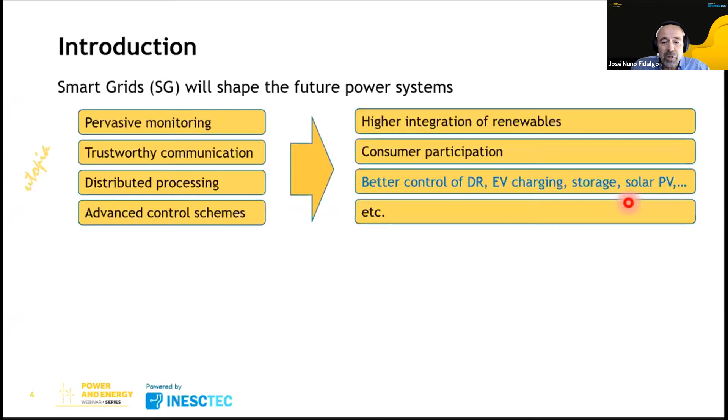Let's imagine a future perfect smart grid with omnipresent monitoring, reliable communications, distributed processing everywhere, and advanced control abilities. These features would allow deeper integration of renewables, consumer participation, better control of demand response, electric vehicle charging, storage, etc. So many researchers conclude that these features can make the load diagram flatter, allowing the postponement of investments in grid infrastructure.

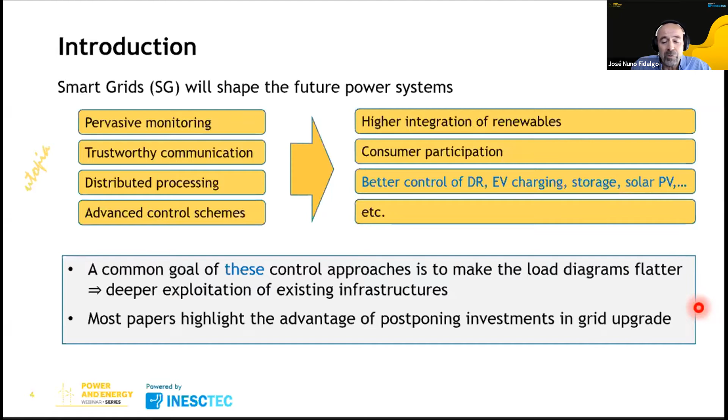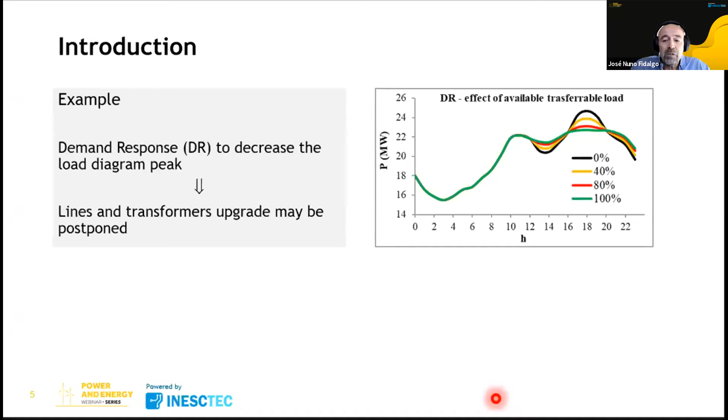For instance, let's consider a demand response program designed for peak shaving, and assume it works perfectly. This would allow the postponement of investment in grid upgrade. The question is, how valuable is upgrade postponement? Should we always do it? Let's see what we found.

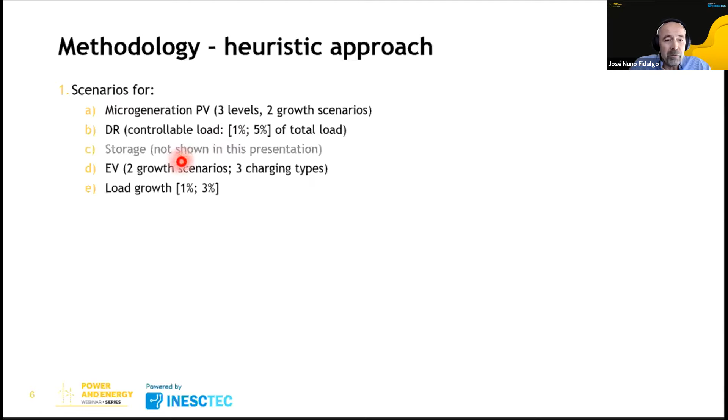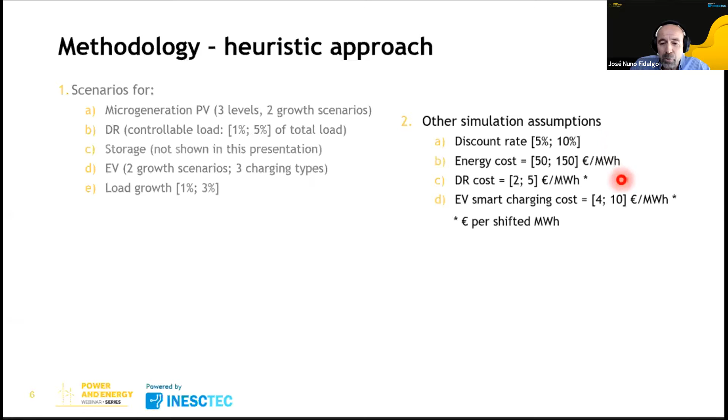In the referred Citines project, to analyze this question we adopted a heuristic approach where several combinations of microgeneration, demand response, and EV growth and charging types, along with load growth, were considered. Many scenarios were considered, plus other simulation parameters such as the discount rate necessary for long-term economic appraisal, energy costs, and so on.

The next phase is power flow, to simulate the network under all those conditions, and this was repeated for a time period of 20 years. In parallel, we also computed the costs, characterized in terms of net present value, including investment costs for reinforcement of lines and transformers, operational costs, and amortization costs over a time span of 20 years.

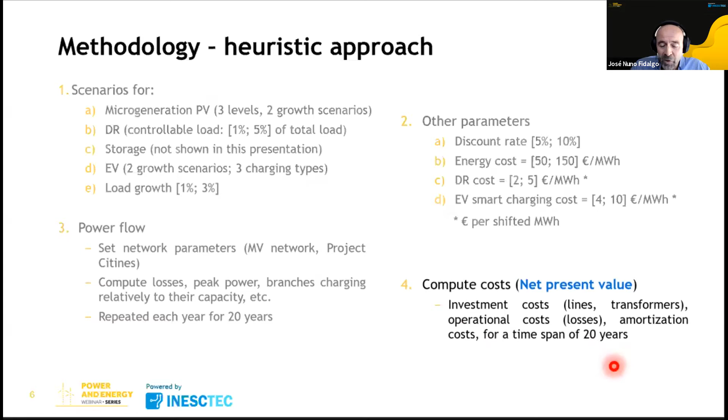So for illustration purposes, let me just show two types of scenarios for microgeneration PV and for electrical vehicles. When we first were involved in this project, we borrowed these projections from official entities, although, as you know, there is always a big level of speculation. But in any case, there are scenarios.

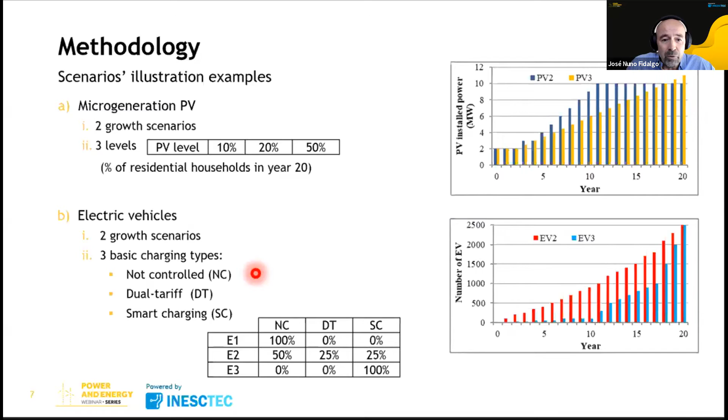For instance, electric vehicles, we have two growth scenarios and three basic charging types: non-control, dual tariff, and smart charging. And of course, according to the electric vehicles dissemination, according also with the charging type, they have different impact in the load diagrams.

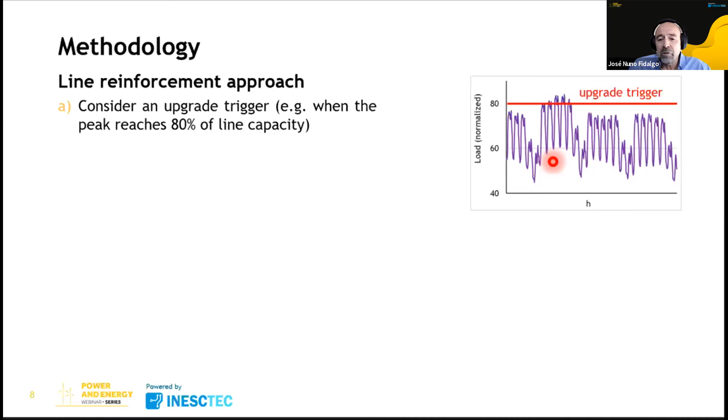In what concerns the reinforcement procedure, we developed an approach in the framework of a project with a Portuguese DSO. The first step consists in setting a criterion for starting the upgrade. In this example, it is when the peak of the diagram reaches 80% of the maximum capacity. Suppose it is a line. When it reaches 80% of the line maximum capacity, we start the upgrade procedure. In practice, this criterion might be combined with other drivers, such as some quality of service index also, but let's forget this for the moment.

Then, for a set of available cables, consider these are the available cables. We must choose the feasible ones. And by feasible, we meant, for instance, if the current line is a 70mm cable, we cannot replace it with a 50mm one because it will have a smaller capacity.

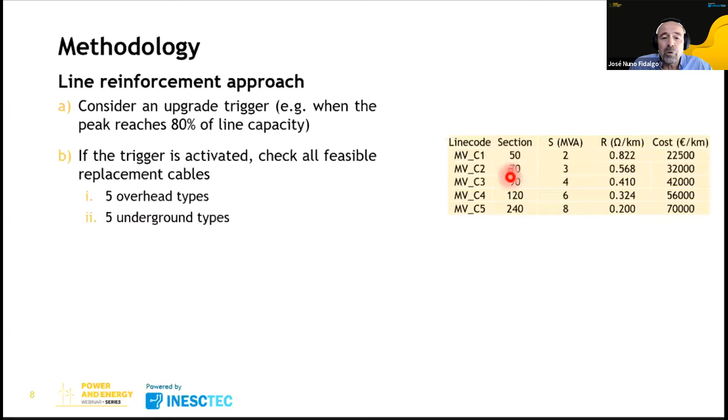And we should compute all the case for all solutions, combine these costs, including the amortization costs, and at the end, we choose the solution with the lowest cost. In this case, it will be this one.

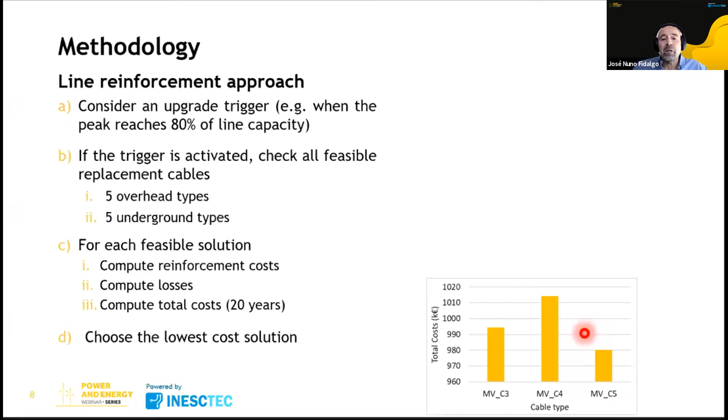So we applied this in the scope of the INESC project, and let me show some results. Several scenarios are considered here, 18. In this table, the first column just identifies the scenario.

The second column is the demand response level. 0% means that no demand response is considered. 3 and 5% are related with the amount of energy that is shifted from the peak. And of course, this is repeated: 0, 3, 5, 0, 3, 5%, and so on.

Third column is the PV scenario. Three are considered in this case, PV 1, 2, and 3. It's not important for these examples to know exactly what represents each PV scenario. And in terms of electric vehicles, we consider the hypothesis non-controlled charging and smart charging.

So for a matter of simplicity, let's compare the green cases with the brown cases, okay? The green cases have non-controlled charging, while the brown case is smart charging. The rest is equal: PV2, the scenario for PV, and the demand response 0, 3, and 5%, and the same in this case, 0, 3, and 5%.

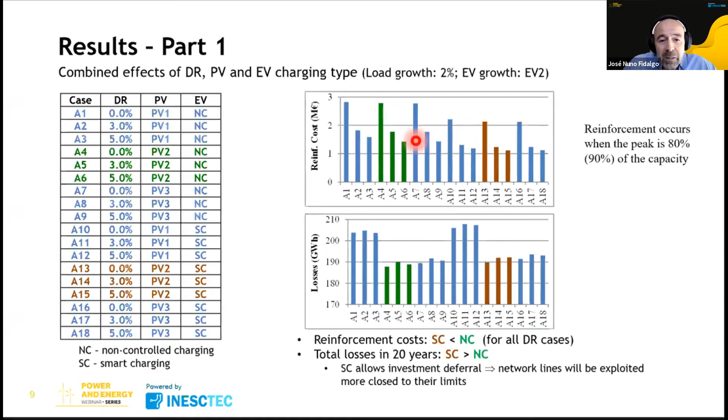Now let's see the other face of this coin. If we compare the losses of non-controlled charging with the losses of smart charging, we see that non-controlled has smaller losses than smart charging. This is natural because, as the reinforcement level for non-controlled is higher, we probably will have lines with larger sections, and so the losses will be smaller.

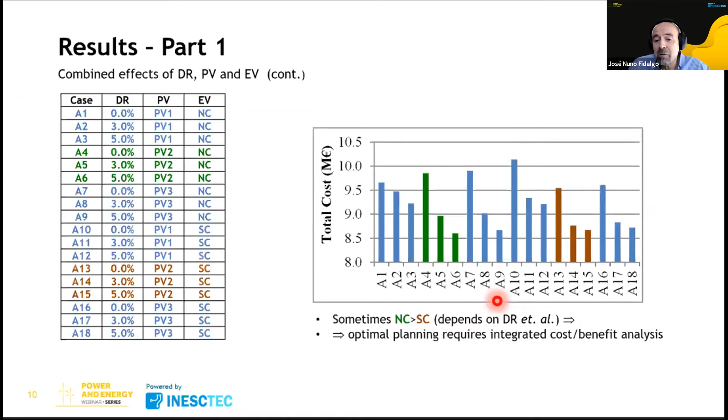Now, let's look at the total costs. When we aggregate the costs of reinforcement, the cost of losses, and the corresponding amortization costs, we obtain these figures. Again, we see that in general, smart charging has lower costs than non-controlled charging, but this is not always true. Just compare the A6 case with the A15 — in this case, the cost is lower. So, in fact, what we can conclude is that there is a trade-off between saving in investments for reinforcement and saving in avoiding losses.

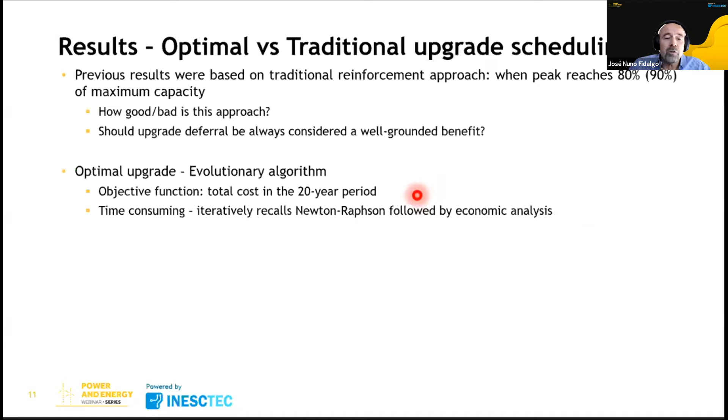So in face of the previous results, we thought we should try to find an optimal reinforcement strategy, and that's what we implemented. We used an evolutionary algorithm, and the objective function was to minimize the total cost in the 20-year period. This is quite time consuming, so we need to consider several simplifications.

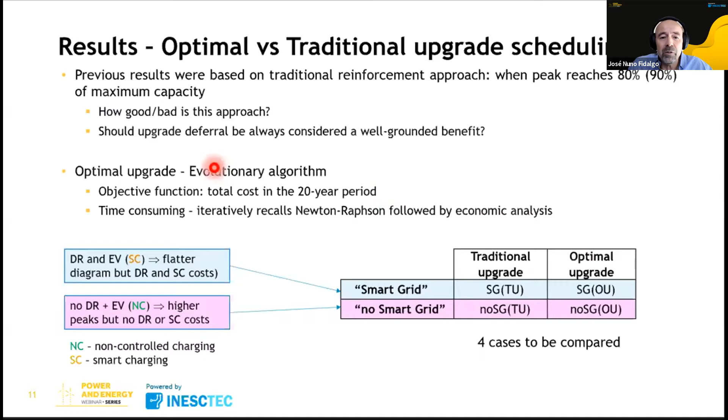One simplification is to reduce the number of scenarios. For this case, let's just consider these 4 scenarios, which are the combination of 2 network types: a smart grid, where we can perform demand response, smart charging of electric vehicles, and so on; and a non-smart grid, where none of these things can be done. These network cases are combined with the traditional upgrade, used in the previous study, and with an optimal upgrade provided by the evolutionary algorithm.

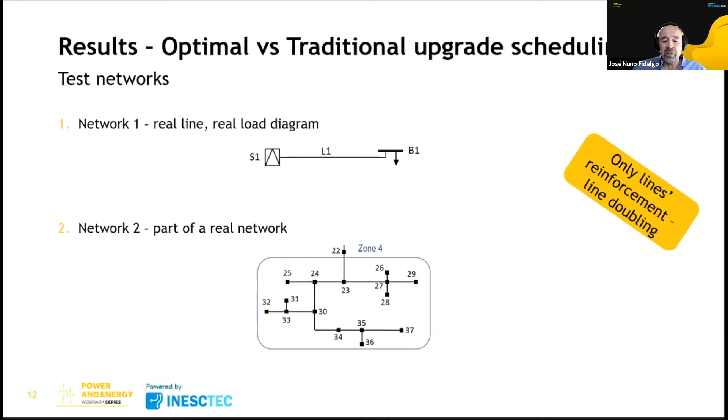Some more simplifications: very simple networks. One of them is the most simple one you can imagine. It's very simple, but is important as a proof of concept. Also, for reinforcement, we only consider line doubling. Whenever reinforcement is to be applied, we consider just the installation of a similar line in parallel with the existing one, so the total resistance will be half of the original one. This simplifies the process a lot. Yes, we know this is not according to practice, but it will be enough as a proof of concept, as we will see in the next slides.

So let me amplify this for you. These are the results in terms of upgrade costs or reinforcement costs, and here we have the cases: no smart grid traditional upgrade, no smart grid optimal upgrade, and the same for the smart grid traditional and optimal.

Let's concentrate on the optimal upgrade case, so the green and blue bars. Note that the green and blue bars are all in the first years. In fact, the optimal upgrade anticipates the reinforcement, while in the other case they are activated when the peak of the diagram reaches 80% of the maximum capacity. The optimal upgrade says we should upgrade as soon as possible.

This might be a bit strange, but we'll see in a moment what the consequences of this are. Another conclusion is that the optimal upgrade is much more expensive than the traditional upgrade. For instance, compare the red bars with the blue bars for the smart grid case: traditional upgrade, we would spend 100,000 euros in this reinforcement, while with the optimal upgrade it's 100,000 plus 200,000. So we spend 3 times more with optimal upgrade than with traditional upgrade.

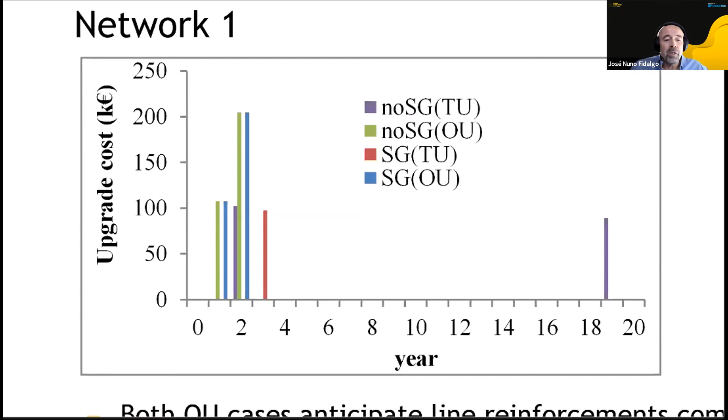Okay, now let's see the other face of this coin: losses. When we look at the losses, we see the opposite. The optimal upgrade, again the green and blue bars, has much lower losses than the traditional upgrade, both for smart grid or no smart grid. The green and blue bars are always below the purple and red. So the losses are pretty high in the traditional upgrade when compared to the optimal upgrade.

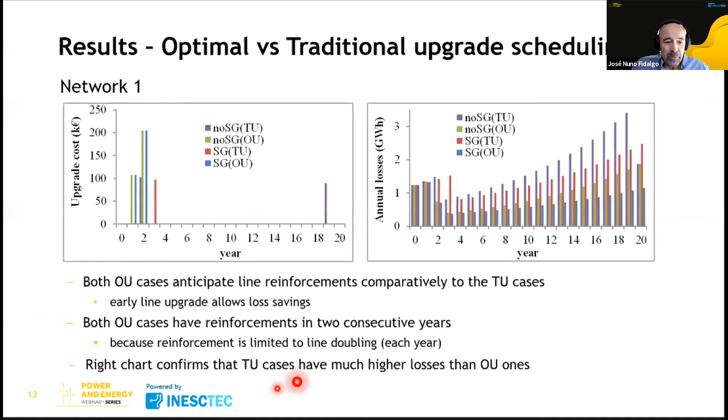Now let's look at the total costs. When we join all the costs, including the amortization costs, we see that the optimal upgrade has much lower cost than the traditional upgrade, both for smart grid and no smart grid cases. We also see that regardless of network type, no smart grid or smart grid, the costs are very alike, comparable. These results are for network one. Remember, it's just one line.

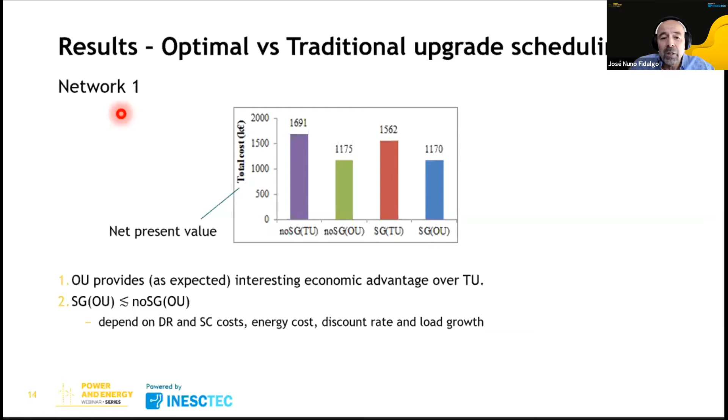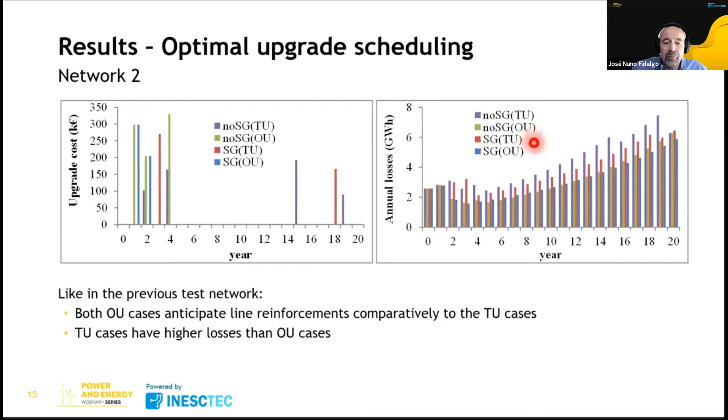Now let's see what happens in network two. For network two, the conclusions are pretty similar. Again, most of the reinforcement costs are in the first years. If you compute the upgrade costs with the optimal upgrade rule, they are bigger than with the traditional upgrade, and again the losses for the optimal upgrade are below the losses of the traditional upgrade. When we compute the total costs, we obtain very similar results. Again, the optimal upgrade shows smaller costs, about 10% less than the traditional upgrade. And again, we have smart grid and no smart grid with similar total cost.

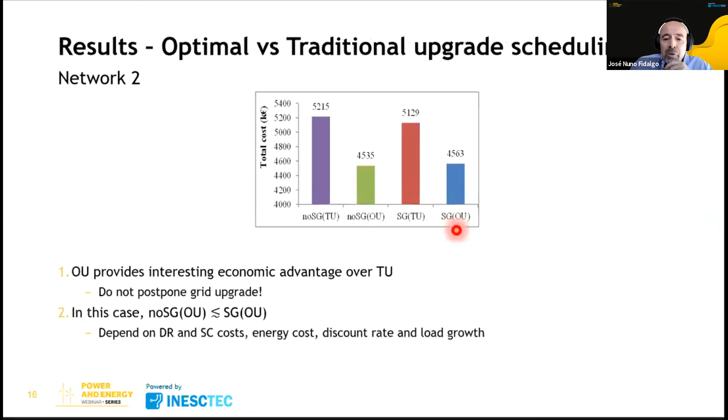So there are lots of conclusions, but I would say the main conclusion is that postponement of grid reinforcement is not always the best option. In fact, our results show that sometimes it is better to anticipate the reinforcement.

Our optimal upgrade approach is very demanding and far from practical. So what if instead we try to find the most economical upgrade trigger? We considered the trigger of 80%, but what if we consider all these possibilities from 50, 60, 90%, and choose the most economical option?

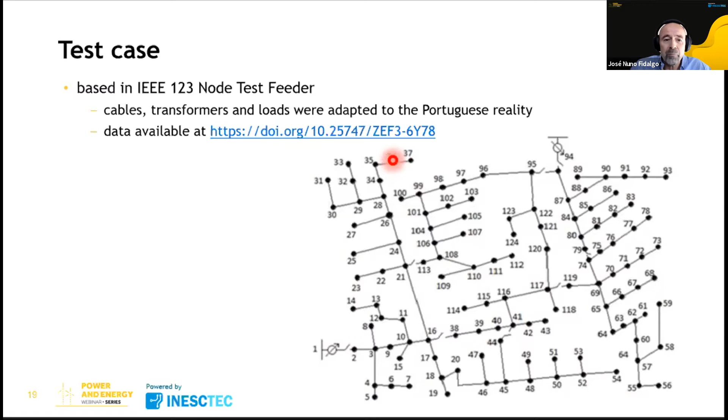That's what we did. In this case, the network test was this one. The data is available on our site, and I can share it if you are interested. The methodology was very similar to what was used in the initial study, but instead of a fixed upgrade trigger, we consider this variation from 50 to 90% in steps of 10%.

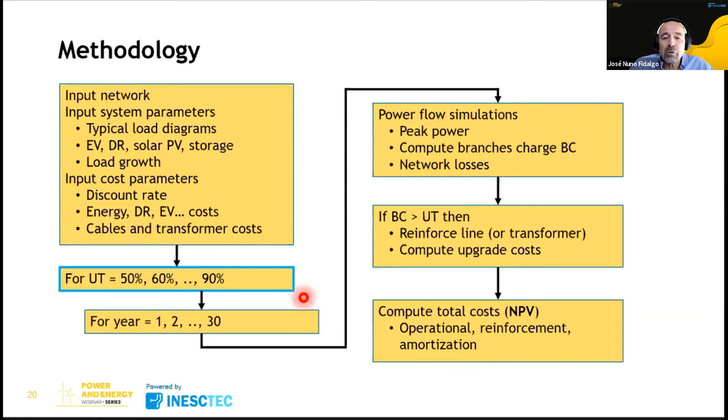Now let's look at the results. First, I will present the results with an energy cost of 101.3 euros per megawatt hour, which was the reference price in Portugal in 2016 for medium voltage. These results are parameterized in terms of discount rate. I would say that nowadays this case will be the closer to the one used in projects, 5% or 6%, which is the most usual.

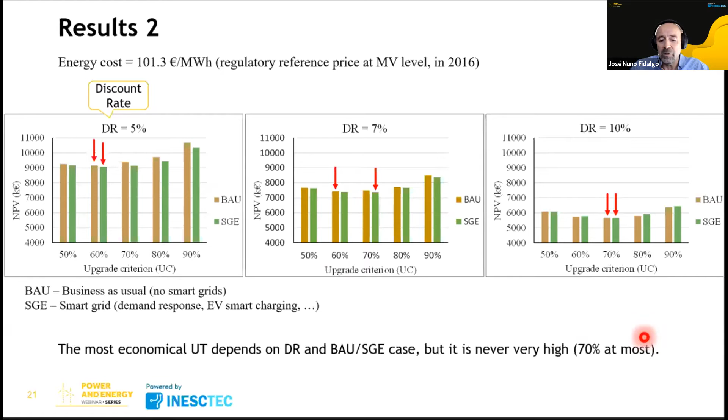Another detail is that, as in the previous study, this was made for a network with no smart grid, business as usual, and for a smart grid environment, the green bars. We can see that the upgrade trigger leading to the lowest cost is 60% for this discount rate, and in another case 60 or 70%, and in this case 70%. So the most economical upgrade trigger depends on lots of parameters, but it was always 70% at most, never very close to the line capacity limits.

Now with the energy cost of 150 euros per megawatt hour. This was suggested by an Italian colleague because in 2016 that was the reference price in Italy. With this price and similar conditions, the best upgrade criterion is 50%, and in this case 60% for a discount rate of 10%. So it's low, meaning we should anticipate the grid upgrade. Why? Because with higher energy costs, we have a higher value for the losses, so we should try to avoid the losses as much as we can.

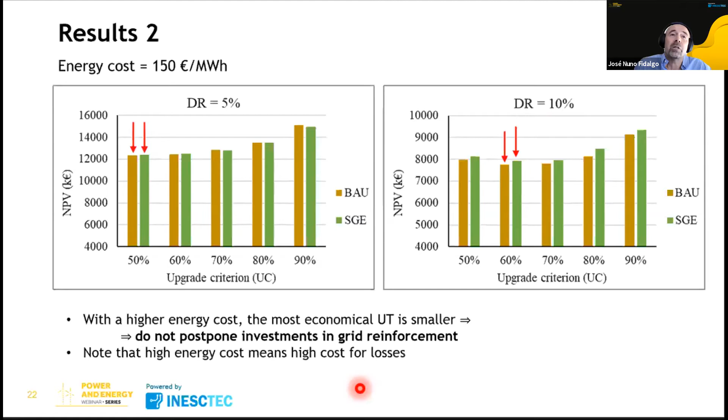But note that if we were able to shave this peak with some kind of demand response initiative, then after this action we would obtain a diagram of the kind used in the previous studies. So the question is, after this, we would probably conclude the same thing.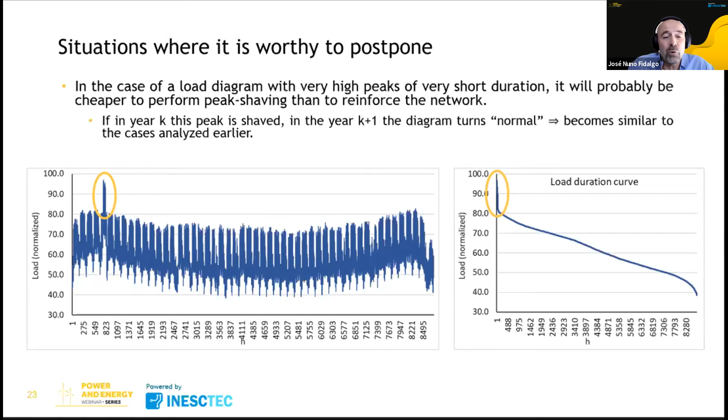Jumping to the conclusions, it's true that smart grids empower the potential to postpone network investments, but this is often disadvantageous—you can do it, but you should not do it. The global costs depend for sure on several parameters, but we found that the upgrade trigger that provides the lowest costs is between 50 and 70%, never very close to the maximum capacity, so do not exploit the network too close to its limits.

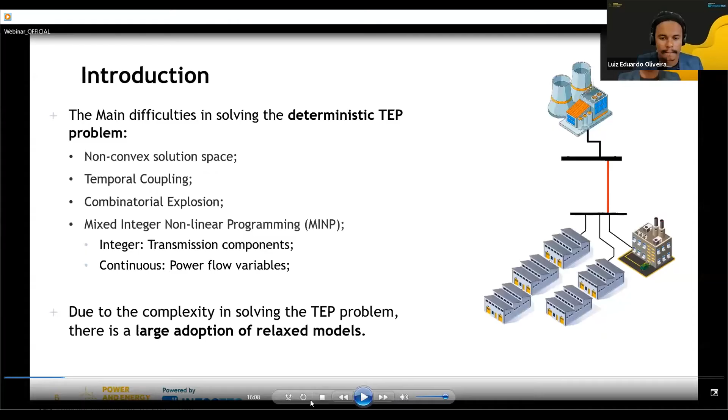Hello, everyone. My name is Luiz Eduardo Oliveira, and today we'll talk about transmission expansion planning and the new challenges.

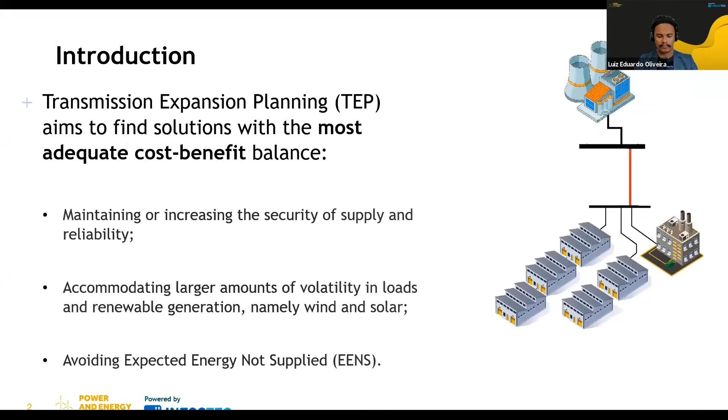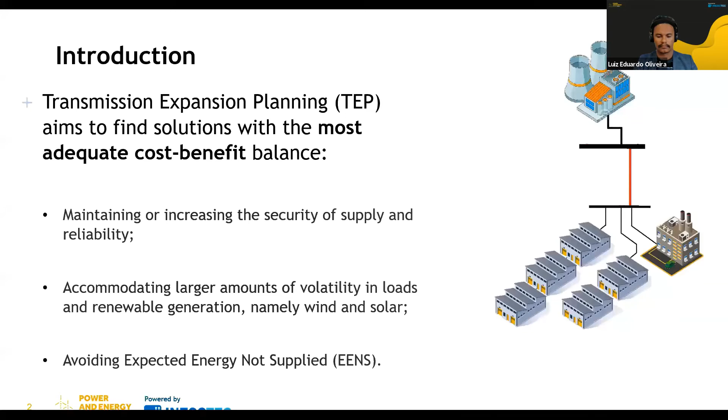Transmission expansion planning basically is a problem that aims to find solutions with the most adequate cost-benefit balance. Normally the planner wants to maintain or increase the security of supply and reliability, or reduce investment costs, accommodating larger amounts of volatility in loads and renewable generation, and avoiding the expected energy not supplied. The main difficulty in solving the deterministic TEP problem is related to the non-convexity of the solution space.

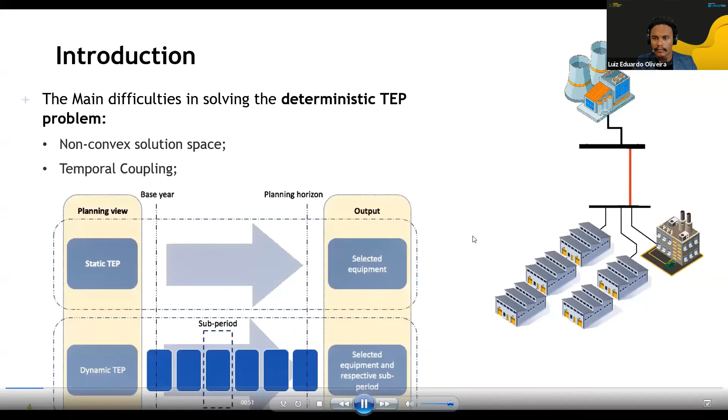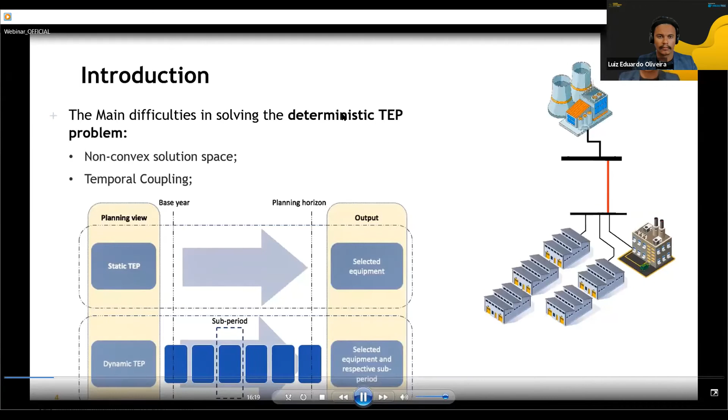The temporal coupling is another aspect that should be addressed. If the planner chooses static TEP, he will understand the planning horizon as a single stage. However, if he chooses dynamic TEP, he will divide the planning horizon into sub-periods. Another aspect is the combinatorial explosion of the possible solution set, leading to a mixed integer nonlinear programming, with integer variables related to the transmission components and continuous variables related to the power flow variables.

The new challenges that catapult the difficulties in TEP are related to the change in active load patterns due to the increase of distributed generation, electric vehicle penetration, the dissemination of smart grids and microgrids, storage systems, and the uncertain behavior of the generation players. Low carbon energy transition is also a new difficulty in TEP problems, with the growing share of renewable energy sources and the decommissioning of coal-fired plants, changing the system topology year by year.

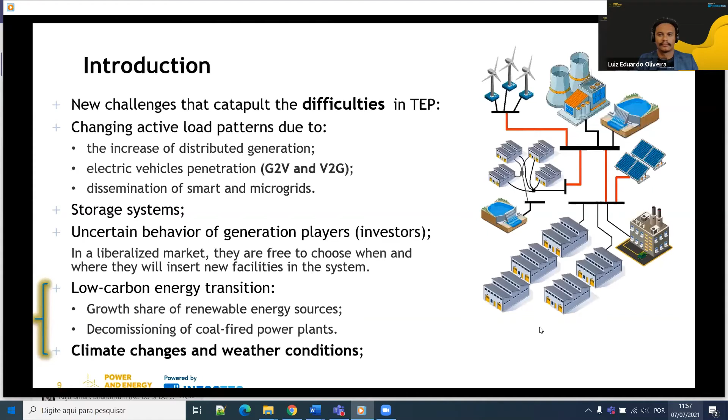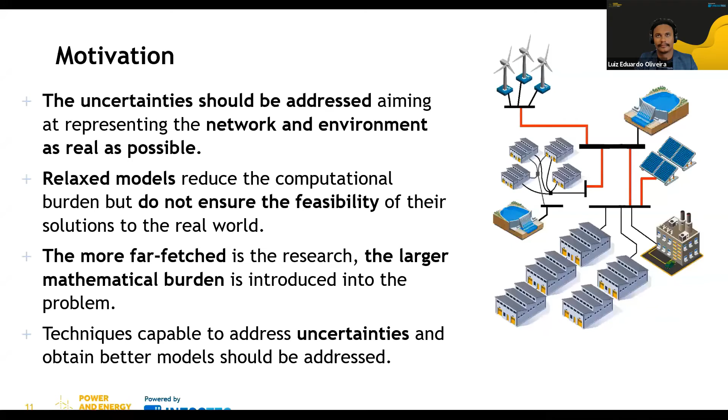The 9 heel-to-toe steps test is a simple and easy test that can show the necessity of representing uncertainties. If you choose a random guy in the streets and ask him to do that test, it represents 9 steps forward and 9 steps back.

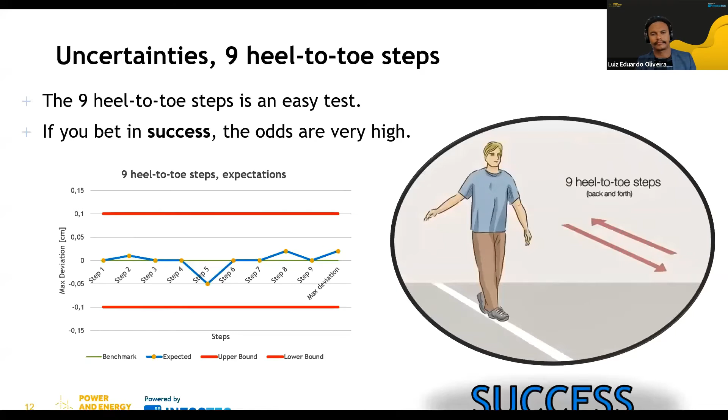If you bet on success, the odds are very high. However, when that guy appeared to do the test, he was completely drunk. We didn't know that two hours before the test he was drinking with his friends, so the chances of success are still assumed the same.

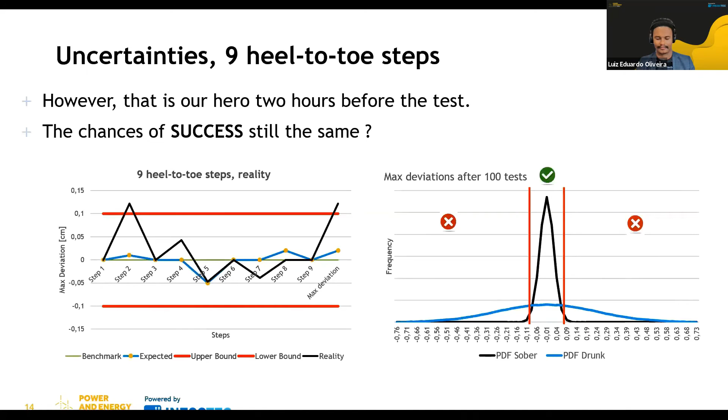After 100 tests, we see that if he was sober, he could complete the test very easily. Considering that he was drunk, the blue curve on the right graph shows that his possibility of success in this test was very reduced. So at the end of the story, the bet was not so good.

Uncertainties appear in power systems in many different ways, and they can be classified regarding their origin, their mathematical model, or their behavior in nature. Here we classify the uncertainties by their origin. Normally, only economical and technical parameters are considered, but environmental parameters have become very important to address, given climate change and weather conditions.

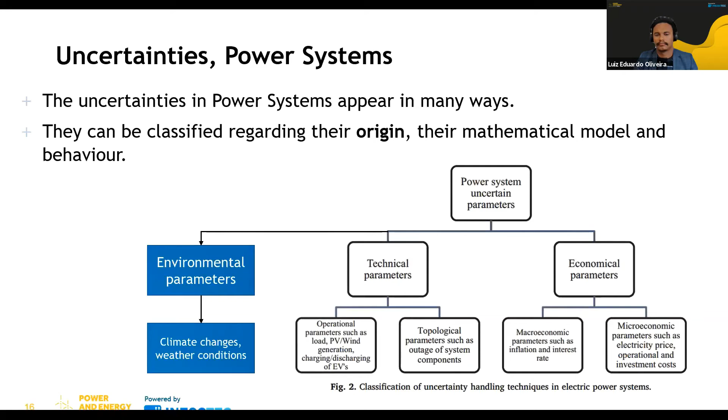If you classify uncertainties based on their mathematical model, you have three main groups: random, non-random, and vagueness uncertainties. Random uncertainties can be modeled as a PDF curve, as well as load, wind speed, or solar irradiation.

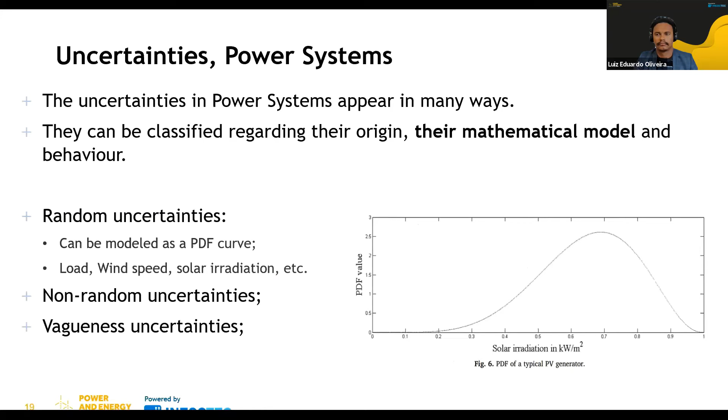However, non-random uncertainties are events that change the game, such as failure probability. Before the failure, the equipment is available; after the failure, the equipment is unavailable. Other examples include market rules, generation or substation player decisions, and governmental and incentive policies.

So basically, non-random uncertainties are something that doesn't depend on the planner, but is going to happen and change the game.

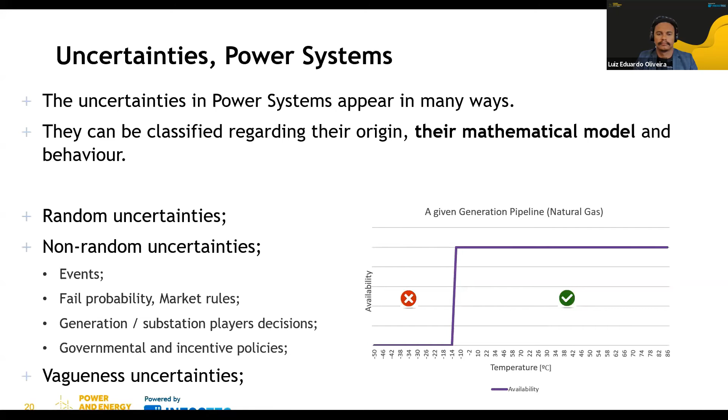And vagueness uncertainties represent something that can be modeled regarding the opinion of the planner. Vagueness uncertainties represent opinions that are not certain as numbers.

If you look at the sky at the same time, at the same place, some people would say it's blue, others that it's gray. If you think about a swimming pool and I ask you which color is the water, some would say transparent, others white, others blue or green. So it depends on your opinion.

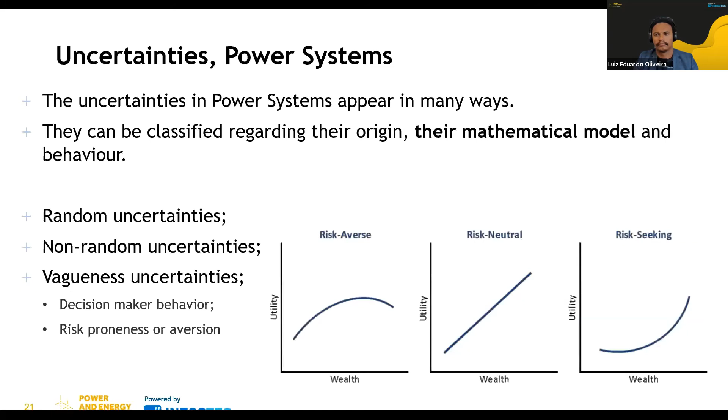Related to power systems, the decision maker's behavior is something considered vagueness. The risk proneness or aversion related to the decision maker is something considered completely vagueness, requiring fuzzy logic to be modeled and solved.

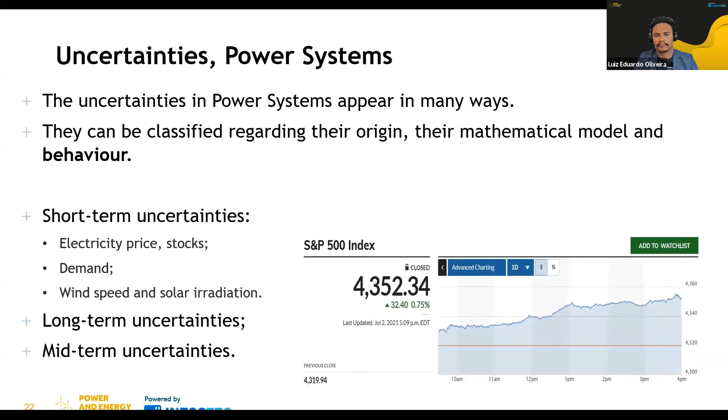Another way to classify uncertainties is related to their behavior in nature. They can be classified as short-term, long-term, or mid-term uncertainties. Short-term uncertainties change very fast, day by day or hour by hour, such as electricity price, stock price, demand, wind speed, and solar irradiation.

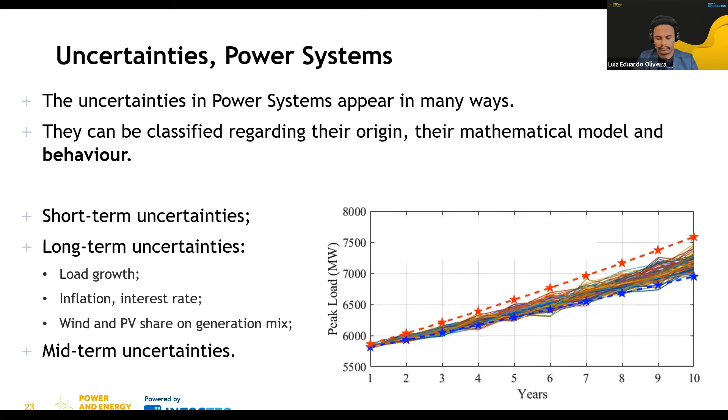However, long-term uncertainties change with time, such as load growth, inflation, interest rate, and the wind and PV share in the generation mix. Mid-term uncertainties suffer both short and long-term variations, as well as EV charging or discharging.

EV charging or discharging on the network, in the short term, behaves itself as a load. However, with time, it also suffers load growth, so it can be considered a mid-term uncertainty.

Wind speed and solar radiation are considered short-term uncertainties because it's not possible to ensure with 100% certainty how they will behave in the next hour or 15 minutes. However, year by year, they behave similarly and don't change too much. If you consider yearly solar radiation, it's almost the same every year.

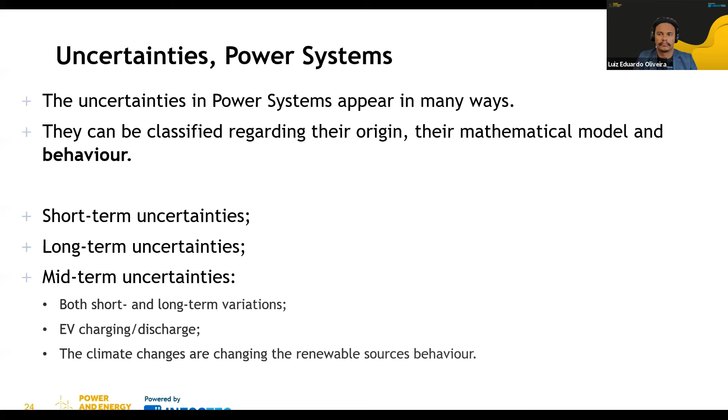The problem is that climate change is altering renewable source behavior, so year by year, the wind speed, solar radiation, and hydro capacity are changing.

The main common uncertainty handling approaches are probabilistic, possibilistic, and hybrid approaches. Possibilistic approaches are related to fuzzy logic; probabilistic approaches normally use Monte Carlo simulation, scenario-based analysis with stochastic programming, and the point estimate method.

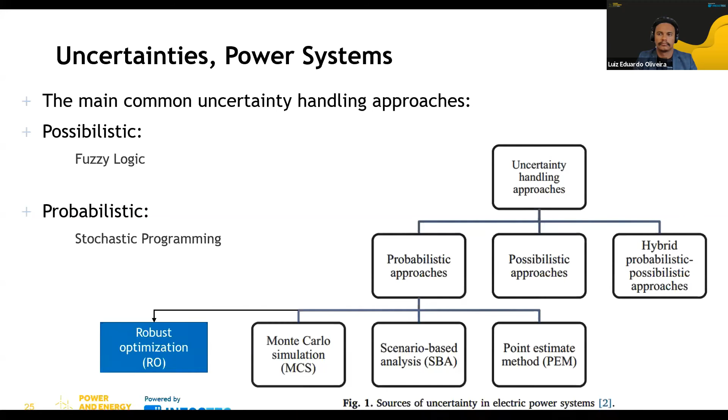Another different technique is robust optimization, which enables umbrella protection without considering a lot of scenarios.

As a test case, we proposed to test the modified IEEE 24 bus system. The modifications are related to the initial demand in each bus, which is multiplied by 2, and the generation capacity, which is multiplied by 3.

An energy transition to a low carbon mix is also considered. Over the planning horizon, coal-fired power plants are decommissioned and new solar and wind farms are commissioned according to the table on the next slide. The demand growth rate is considered as 2% per year.

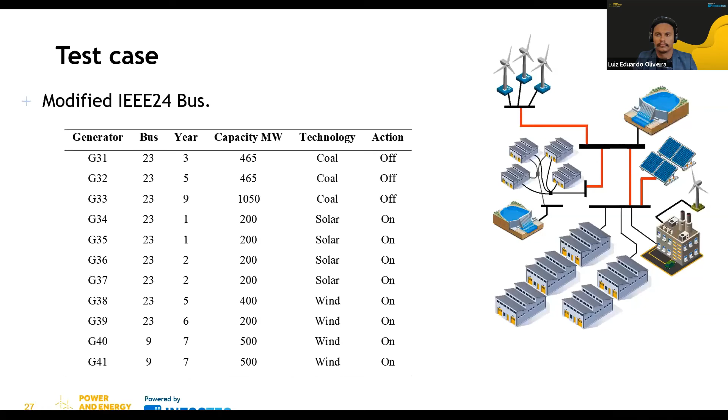We planned to decommission 3 generators, and in parallel, we'll insert 8 generators: 4 solar and 4 wind farms.

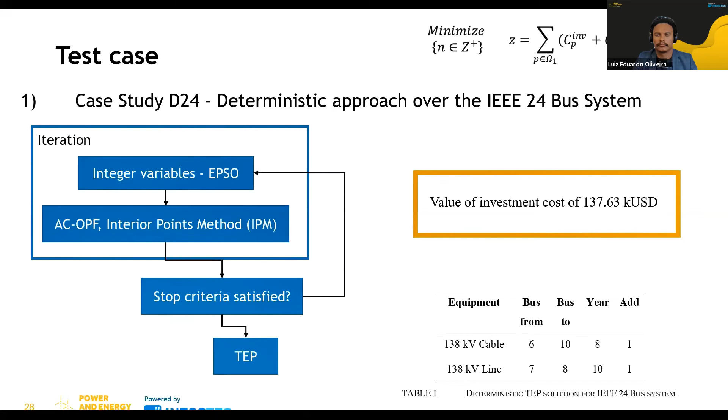The first case study is the D24, the deterministic approach over the IEEE 24 bus. In this test, we planned to insert 1 cable and 1 line, and these two pieces of equipment represent an investment of $137.63 thousand.

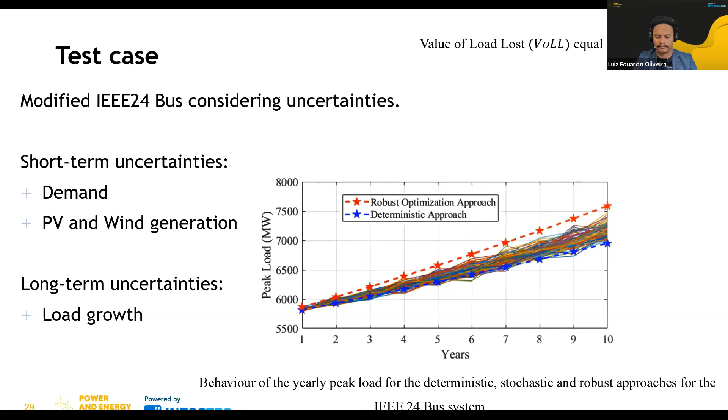However, when we consider uncertainties, we inserted short-term uncertainties related to demand and PV and wind generation. We also addressed long-term uncertainties with load growth. In the case study S24, we did a stochastic approach over the IEEE 24 bus system.

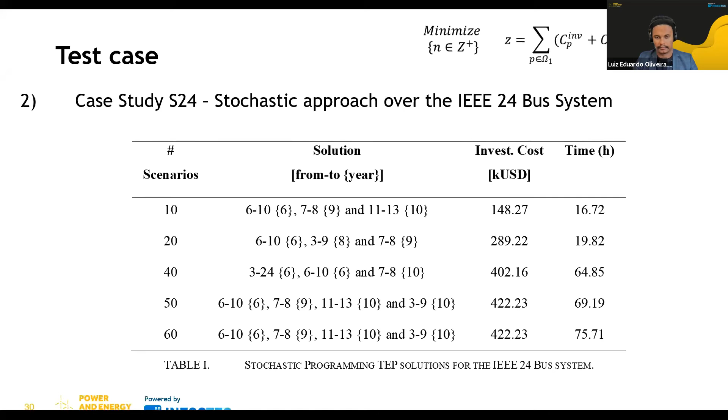The most important thing in this table relates to the investment cost and the time required to solve. As more scenarios we use, more investment cost and time is required to solve. However, if you compare the best stochastic and the deterministic solution, you see the difference in the worst case scenario.

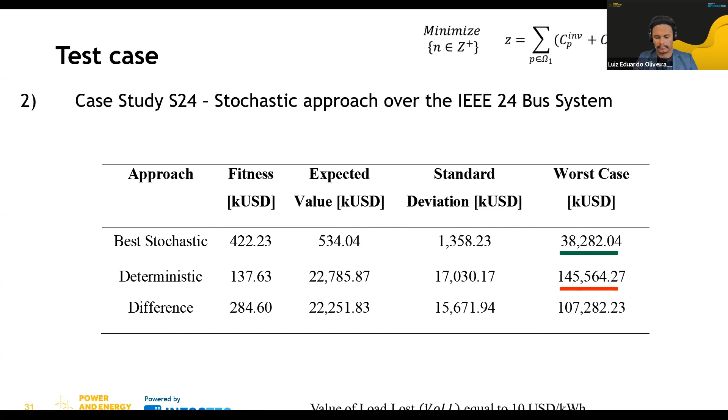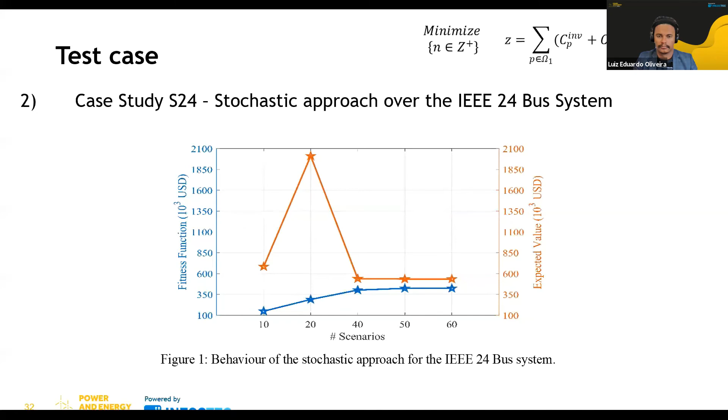The third test case is the R24, related to robust optimization over the IEEE 24 bus system. In this scenario, we reach a solution with 3 lines and 1 cable that represents an investment value of approximately $429,000.

The robust approach required almost the same time to evaluate the system as the deterministic approach. However, the solution of the robust optimization technique reached a fitness almost 4 times the value of the deterministic solution, which at first view can be considered not a good solution. However, if you consider the robust solution in the worst case scenario, it offers an umbrella of protection, eliminating the ruin risk and turning a black swan into a gray one.

There is a variety of uncertainties that must be addressed, and the renewable share is growing year by year, with its impacts on power systems too. Climate change and weather conditions, as well as many kinds of uncertainties, should be addressed in order to prevent unexpected events. Even if you don't know when the event happens, the most important thing is to be prepared for it.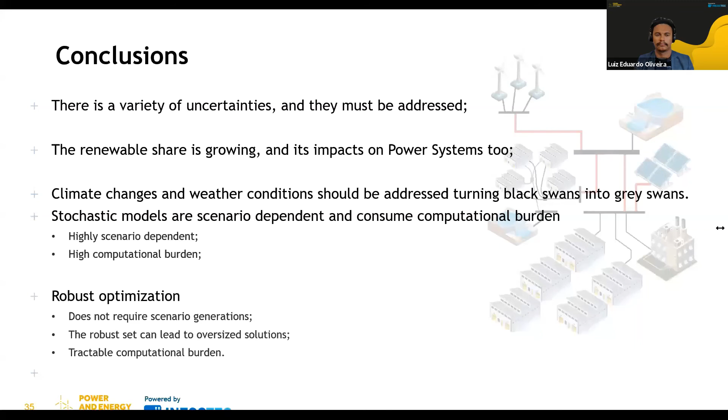Related to the approach, stochastic models are very scenario dependent and consume a high computational burden. On the other hand, robust optimization does not require scenario generation, but the robust set can lead to oversized solutions.